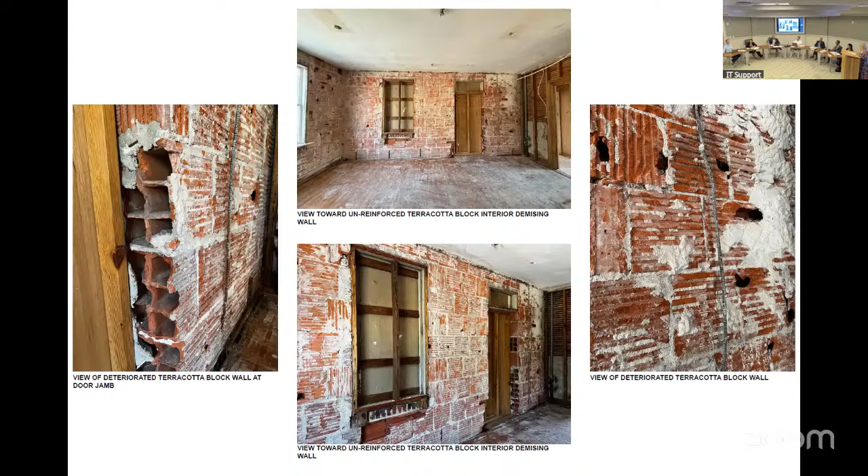It has deteriorated beyond reasonable repair, and we will also remove the two exterior staircases, which are no longer code compliant and interfere with our revised plans for safety and accessible circulation. That said, we do plan on retaining a portion of the building constructed with the CMU block.

We have been able to find ways to reinforce that structure, and it provides a reasonable path for reinforcement in the future. Our structural team—I'm not sure if you've seen the structural letter our engineer drew up—he's confirmed that with appropriate retrofitting, the CMU block wall will meet current safety and code requirements. So I believe I will open it up now to questions and discussion regarding the scope, and thank you all for your time.

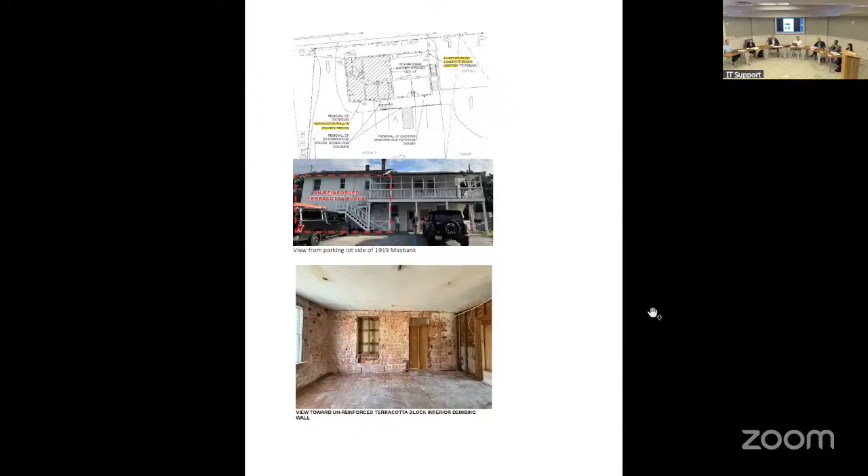Questions from the board for the applicant? What are the dimensions of the actual terracotta blocks? About an 8-inch thick block, by 12... by 8. Okay, 8 by 8 by 12. If you look at it, there's a lot of horizontalness in there, so I don't think you could vibrate concrete down in there. I wasn't asking for a structural reason, but we'll wait till the next item.

Any other questions from the board? Okay, great, sit down. Is there anyone from the public here to speak on this item? All right, city staff recommendations.

In the ordinance that discusses demolition in the purview of the design review board, it states that the board should consider the architectural and aesthetic features of the structure, the nature and quality of the structure, including the architectural fabric, any historical significance, the nature and quality of the surrounding area, and the structure's contribution to the overall streetscape of the area. The board and staff should only consider the parts of the provided structural report that do not talk about future renovations and only the parts that speak on the current condition of the building. The original portion of the building being asked to demolish is from the 1940s.

As per the architect's explanation, the original building is an unreinforced terracotta block structure. The existing floor system is wood framed and bears directly on the terracotta block, and the roof system bears on the block wall as well. We knew that the existing terracotta block wall would not support the new floor system, so we were initially proposing to build new structural walls inside both the terracotta block and CMU block walls, letting the new walls support the new floor systems and existing roof. Unfortunately, our structural engineers cannot tie the new stud walls into the terracotta block.

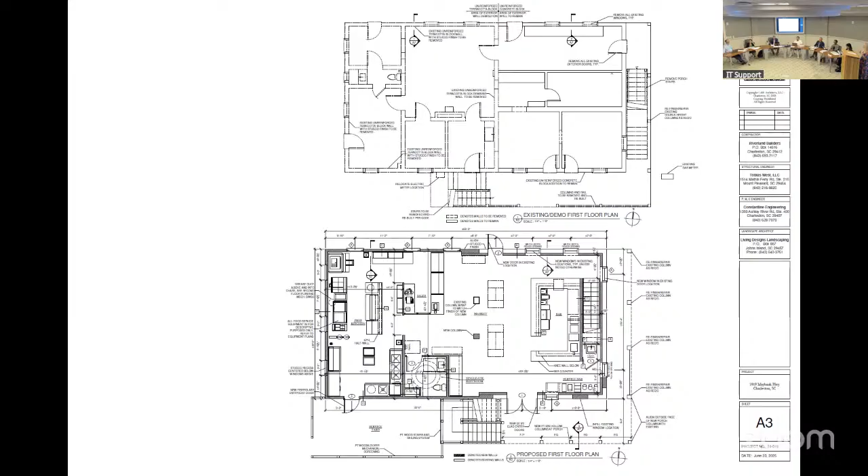So for the exterior walls, while we're demolishing certain sections due to structural concerns, we are committed to retaining the original likeness of the building with the new construction. We'll reconstruct the exterior to maintain the character of the original structure, aligning closely with the architectural style that defines it. This is an existing stucco building, so we are proposing to retain the stucco character and the appropriate thickness and finish. Where we are removing windows or adding new windows and doors, those will be recessed as far back into the building as possible to give that lovely depth and shadow that we love so much.

You'll see what we're demolishing. We are proposing new windows and doors in most locations, original locations. However, where we feel something needs to be realigned, we're proposing to adjust those in plan. And you'll see that we are adding new shutters back onto the facade with new exterior doors.

A lot of those will be in the same locations to preserve the building's visual appeal. Where necessary, we'll be shifting windows and doors to accommodate the new interior layout. We will return to the traditional features of the building, such as the stucco, adding shutters, and adding louvers back into the gable ends of the building.

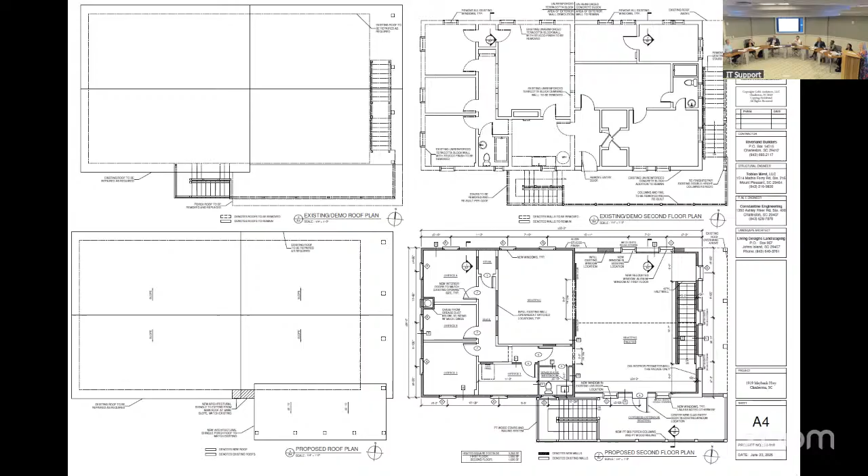If you go back to the second level floor plan, you'll see we have an interior and exterior stair up to additional seating for the market, and there's some offices on the interior. Our proposal includes that new porch addition to allow for seating at the exterior. And everywhere else, you'll see if we go back to the rendered elevations.

The roof, we'll be doing repairs as required. We intend to maintain the exposed rafter tail detail throughout the entire building. Where needed for the mechanical screening, we're proposing wood louvers to conceal that area.

Like Daryl was discussing, another reason why some of this building needs to be demolished is because when we go in to remove the existing concrete pad to structurally reinforce the building's foundations, we have concerns about those facades. It will need to have new building foundations and footings.

I believe I am ready to open it up. Thank you for the consideration. Thanks. Questions from the board? Got a few.

Did you guys consider doing it out of CMU? Because it looks like it's framed, right? It is framed, and the other half is CMU. So it's stucco on frame. We're proposing a wood frame, a 2x6 exterior wood frame and 2x4s at the windows to give the offset. CMU would just be cost prohibitive, I guess. That's what our developers are telling us. It's at the request of our developer.

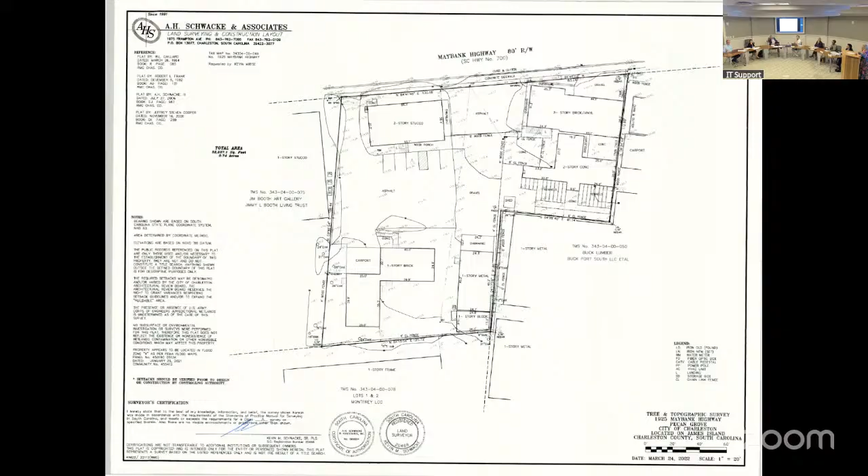I don't know if my images here capture that building back there. I don't know if anybody wants to see this - is this what you're referring to? Yeah, you could see it. I think it'd be helpful for everyone to see that, just that they're not making any changes to the back. Oh yeah, beautiful structure.

I mean, you're not putting windows or anything? I think they're boarded up right now, just going to keep it completely closed. There may be a window, but not too much other than that. Definitely want to work in that kitchen. Did you want to see, David? I saw it, okay.

Any other questions from the board? No?

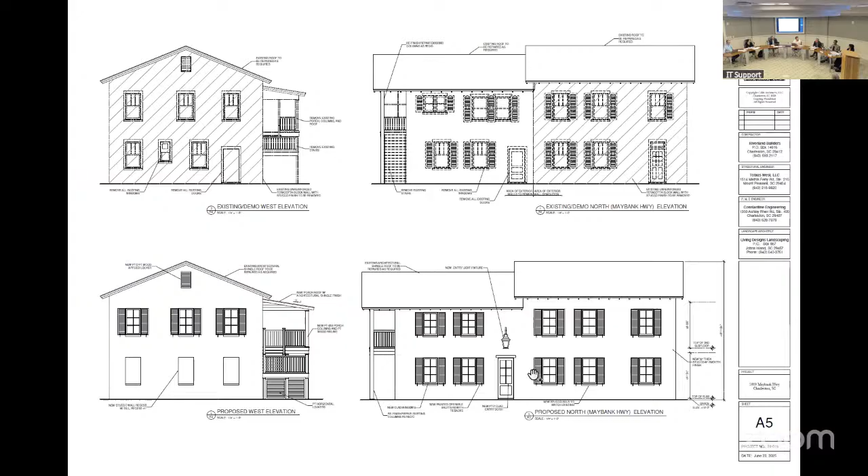Do you guys think it's important to a little bit more clearly express the difference between existing and new, besides an expansion joint? Yeah, that was one of my questions - did you look into anything a little bit more, not necessarily contemporary, but something that separates it from new to old? And it's just going to be a vertical expansion joint, no offset from new to old. Why or why not? I guess I should have asked that question.

I think for this building, in my opinion, it's kind of a background building, and they were going to reuse exactly what was there - not necessarily saying you should do that even if it was a historic building. And the old part is an addition. Right, so it was an addition to what they're tearing down and demolishing.

I do think though that if you're going back with a different structure, you've got to be cognizant of the thicknesses of the stucco, what kind of stucco you have, because you're going from a two coat direct apply to block. And then I hope it's not acrylic, but if it's acrylic, that's a lot thinner. And if you're framing it, it can look different, the texture could look different. So I would say definitely look at those details - we should make sure that if we're trying to go back like it was, the texture of the stucco should look as close to the same as possible.

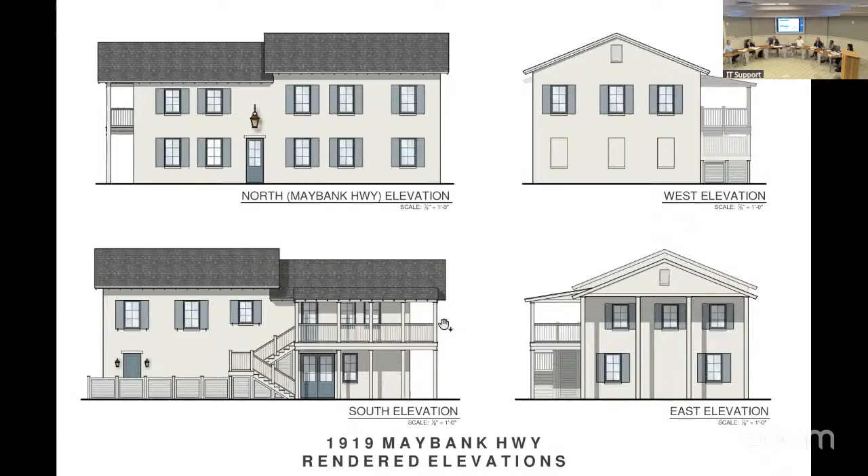Number 6 on staff comments, I doubt they can put shrubs in that area where the loading and unloading is going. I wasn't sure of where the kitchen entry is either. It looks like there's an entry here. You see my cursor? Yeah, there's an entry right there, and there's an entry on the side.

I was asking for shrubs right here. That's not where enough- that's where that roll up door is. Yeah, it looks like it didn't look like that. But it's only on half of it, and then the other half there's like a concrete pad out front. You can see the roll up door there to the left. I guess shrub it where you can.

Yeah, I think it's crying out for some big volume shrub where you can. But anyway, did you have something to add?

Well, I think, Bill, if you wanted to elaborate on your questions about edging and all. Yeah, I mean, obviously, I think we just need more detail on the materials for the paving area, and if it is gonna be an aggregate, require edging.

So, staff comments 1 through 8, board comment: provide study details for edging in the parking lot. Provide more information on proposed materials for the parking lot, and where it is aggregate, provide edging. Beautiful. Any other comments, Bill?

Anything else, guys? Okay, so we have a motion for conceptual approval with staff comments 1 through 8 and board comment to provide additional information on materials for the parking lot and where it is aggregate, provide edging. And do you want me to say show us what you've thought about with the expansion joint and stucco?

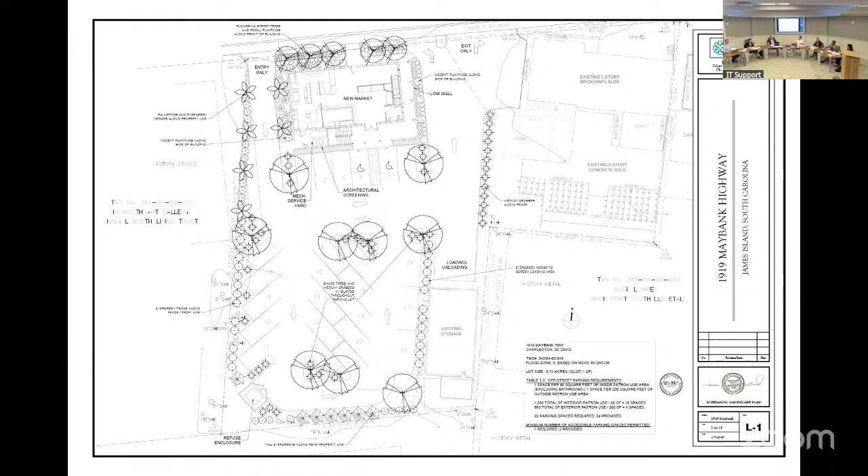Now we'll move on to item 4, which is preliminary approval for a 4-story multifamily development with 62 units.

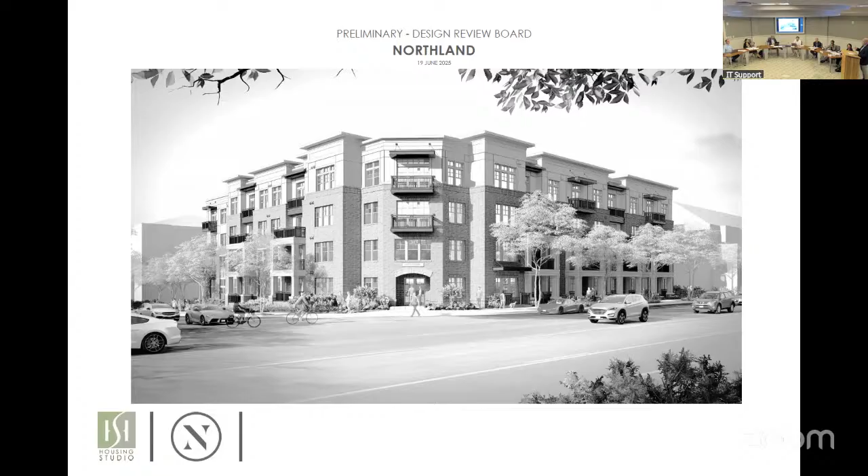So we're gonna be relatively fast here tonight.

Please state your name for the record. Chad Askew with Housing Studio, we're the architect for the project.

So we had several comments. We had 3 staff comments from our previous meeting with you guys a couple of months ago, and thanks again for being here and letting us come before you tonight to address those comments. Two of those we have just immediately addressed, just as you as a board asked us to.

One is that we did reintroduce the transom windows back to the 4th floor where they were shown on conceptual. They were taken off on the last hearing, which was preliminary, but we ended up doing a conceptual reapproval due to some changes that were out of our control. But we have brought those back. I think we agree that's a stronger solution.

The other comment we directly addressed per your feedback was that we simplified and selected one fiber cement material or trim detail. We've gone ahead and used the reveal trim detail for all of the building instead of just the upper floors, to simplify and clarify that.

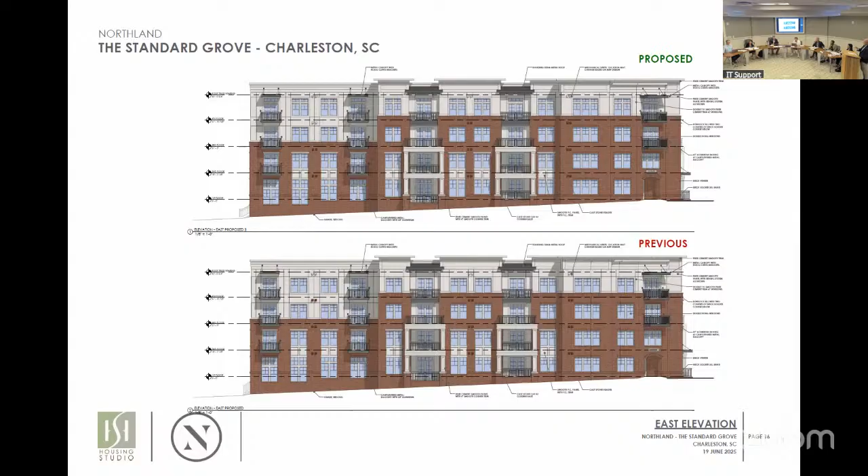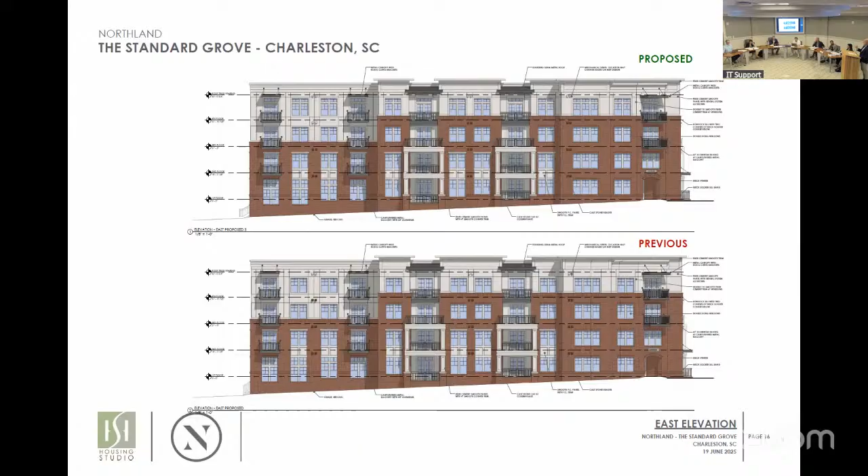So on the far right-hand side, that first bay, the windows on the far right — we had not connected the first and second floors, and I know that's something the board commented on. They'd like to see those connected throughout the project, and we've done that everywhere except in this location. We've still not shown that. If the board feels strongly about that and would like to make it a condition for approval of preliminary, we can make that change.

But David, if you don't mind going back a few more slides to the renderings, there's something I think is apparent in the renderings. Go to the first one, go back.

There we go. This corner piece here, which you don't see in elevation — but the way you view this building as you come down Maybank and turn onto Promenade Vista, you're going to see this corner holistically. On the right-hand side, that's actually a unit entry with a canopy, which really precludes us from being able to connect the first and second floors.

What we tried to do at this corner was leave that separation at the first and second floors just in this area, so that as you read this corner elevation, it's consistent and symmetrical about that corner entry condition. So that's why we left it that way.

I think that when that was discussed in the previous hearing, it was in board member discussion, so we couldn't give you any insight on that. But that's why we chose to leave that one location the way we did. We're happy to revisit or adjust that if you guys feel strongly about it.

Those are really the architectural comments the board presented to us. I'm going to ask Colleen with Seamon Whiteside to come up here and address landscape items really quickly. Thank you.

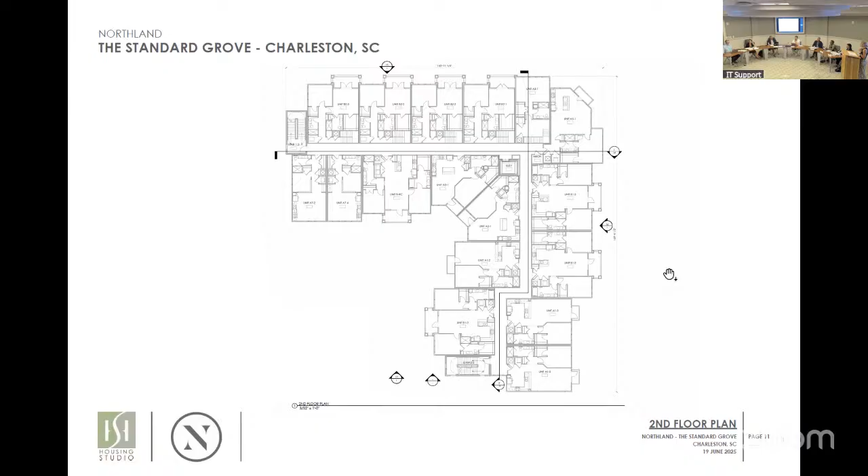Will you go to the slide near the beginning that has the previous and proposed site plan? Sure, it's close to the beginning, right after the corner he just talked about—actually right before that. Sorry, there it is.

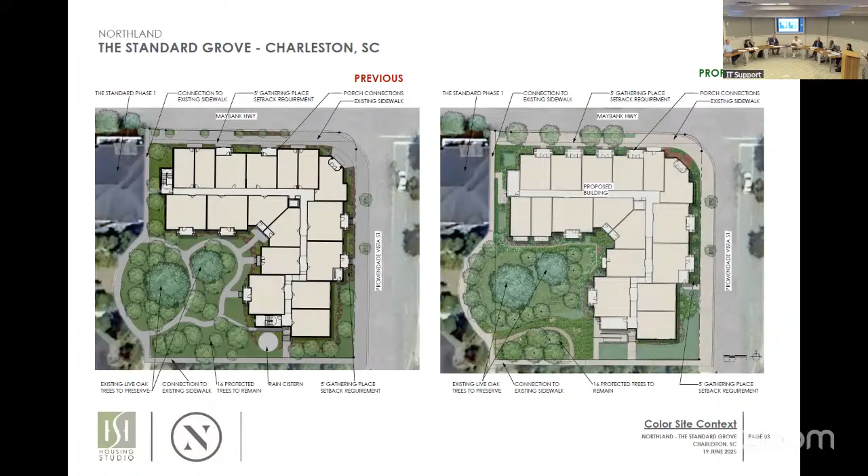Board questions for the applicant? What is your pervious path?

Right now it is, I believe, mulch, because it's a natural tree save area, so the intent is that it feels essentially like you're walking in the woods.

Have board comment or questions? What's the retaining wall construction? In the back—oh, it's a block retaining wall. Yeah, it's a block retaining wall.

I had a question on that wall as well. I didn't find in the set how high this wall is—I was wondering if it maintains a consistent height from the top to the low side, or has that not been determined yet? Daniel Etheridge, the engineer: it is consistent except where it tapers on the edges. About how tall is it? About 2.5 feet.

Pretty minimal, thank you. I know there were details of the block shown, kind of generic details—it showed the material but I wasn't sure if it's some brick too, since the rendering looked like it showed a little brick.

Ben, are you talking about that wall? Yeah—no wait, the trail. I wasn't sure. The trail—yeah, it looks like it's rendered at the back of the site, five feet tall. Let's make sure we're all talking about the same wall. This wall—yeah, that wall's 2.5 feet tall? So the rendering is misleading, off. Yeah, okay.

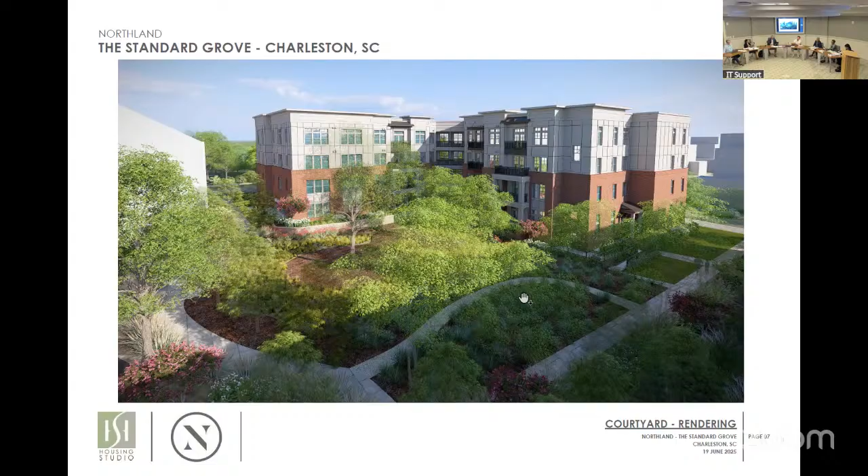I applaud the changes you made from the last meeting. The upper level definitely has a more clear material selection, simple but elegant, and increasing the brick height so it's more of a continuous band around the building helped a lot, I think, from the staggering up and down.

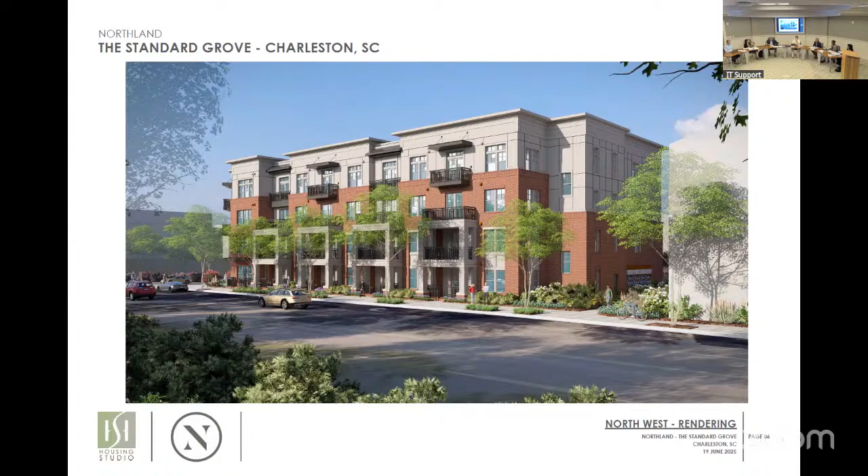Yeah, the only comment I had was questioning how a retaining wall would look with block in that location. If it is that high, staff needs to review whether it's going to be 5 or 6 feet. Brick would look a lot better, especially since it's on the corner there, to match the base. No, I didn't have any other comments other than that.

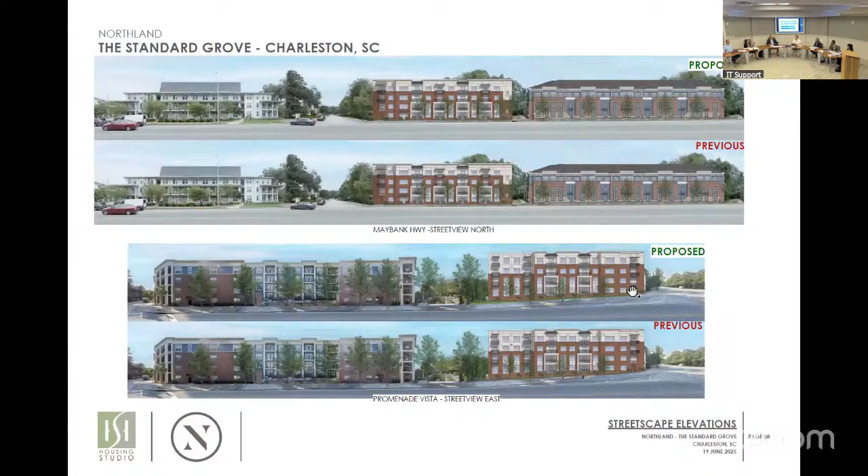I agree. I appreciate your explanation of not getting the window vertically. I think it makes a lot of sense, and I don't think I would have seen it unless you explained it like that. I think it's a natural stop point for it. That corner can kind of stand on its own, it almost looks civic, which it arguably should. It's a knuckle - that's the architectural word. So yeah, I don't really have any comments beyond that.

I think it's a pretty logical extension of phase one. I actually wondered how y'all were ever going to do a building on that little leftover piece. It's a tough one. In the interest of transparency, I was the landscape architect for phase one when I was with Seamon Whiteside.

I would like to see the path be ADA compliant.

So do we have a motion? Motion for preliminary approval with staff comments 1 and 2. I second. Board comment: for the pervious path to be accessible.

Is final review by staff? Did you want to add a comment about the site wall? I guess staff's going to be reviewing that detail, but if you'd like to see brick, you should say that. Yeah, so I'd say if it's greater than 2 feet, the material should change to brick masonry.

I think regardless, it should match the base. You want to match the brick? Yeah, okay, match the brick. I'm okay with that. So we have a motion for brick only on the exterior of the retaining wall, brick veneer on the block. Is that our comment, and ADA? That will, or we can recommend a material.

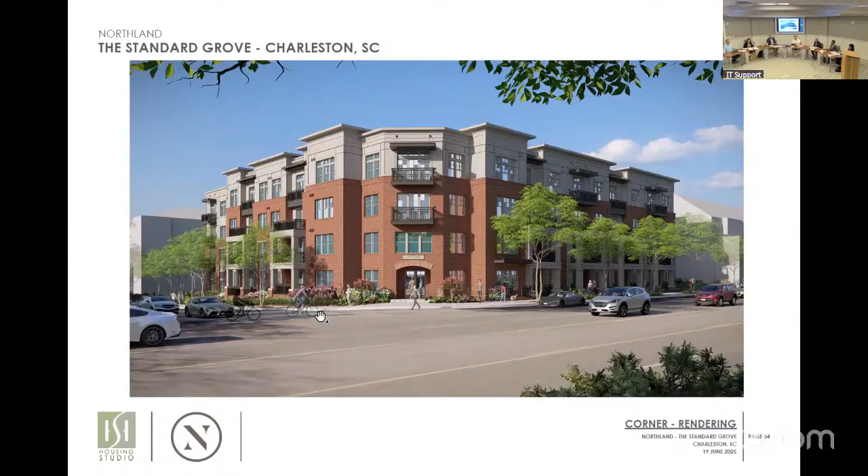Item 5 was deferred by the applicant, so now we just have to approve the minutes from the June 2nd meeting. Steven, move to approve this? I wasn't here, so - oh, no. I will make a motion to approve the minutes from the June 2nd meeting.

Is there a second? Second. Motion for approval, Adriana? Yes. Stephanie? Ben? Yes, I wasn't - also, I know, okay great, I did watch it. Passes.